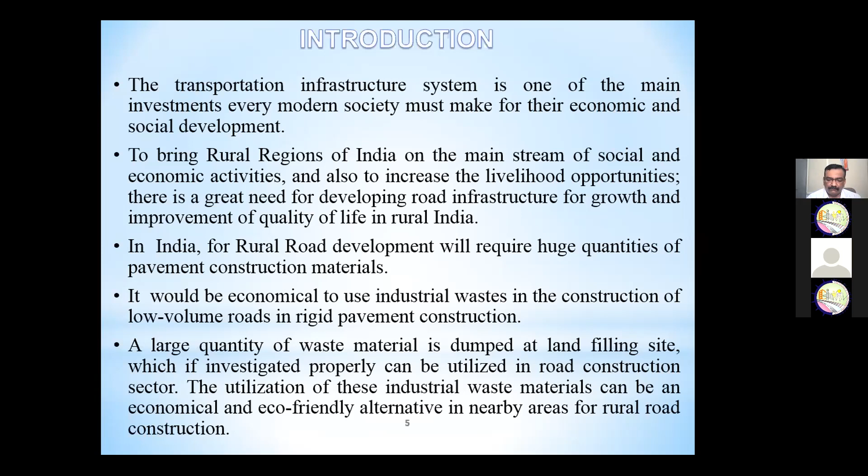Now, as per Rastogi D 2012, rural road connectivity is a key component of rural development since it promotes access to economic and social services, thereby generating increased agricultural productivity, employment in the industry and service sector, as well as productivity, which in turn expands rural growth opportunities and real income, through which poverty can be reduced.

As per Sarkar Asoke 2012, village roads in general have a low volume of traffic consisting mostly of rural transport vehicles. Due to the shifting of industry towards the villages, there is an increase in the volume of traffic on village roads. It necessitates providing a cost-effective solution of connectivity to the villages.

Now, just like the Pradhan Mantri Gram Sadak Yojana, it was a good opportunity at that time, and now also with the current infrastructure development and the growth of construction in the road sector, the building sector, and many other areas, we use this concrete beneficially. Just like in 2022, the Pradhan Mantri says we are required to give houses, and if we use this kind of sustainable concrete, then we save lots of money. Even on national highways and expressways, if we go with this type of concrete, we definitely benefit.

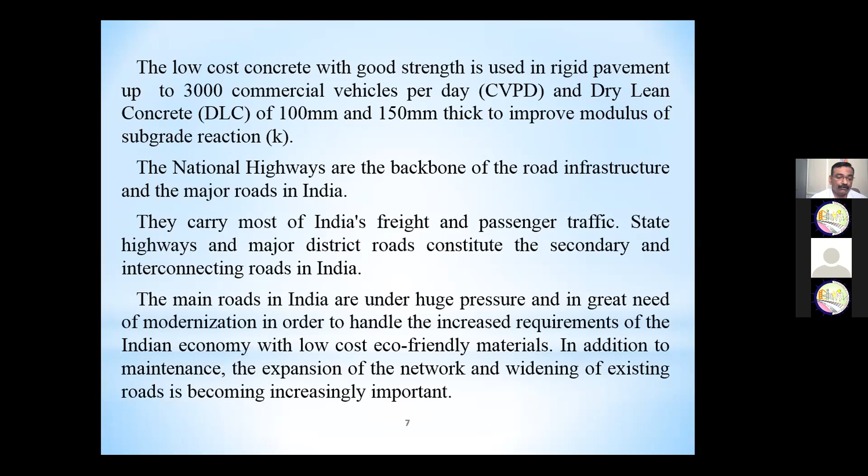So in addition to maintenance, the expansion of the network and widening of existing roads is becoming increasingly important. So just go through this Indian road network in various years, 1950 to 51, 60 to 61, to 2015 to 16 and more. The national highways, state highways, district roads, rural roads, urban roads, and project roads, huge development. And India is having one of the largest road networks of around 60 lakh kilometers, consisting of national highways, expressways, state highways, major district roads, other district roads, and village roads.

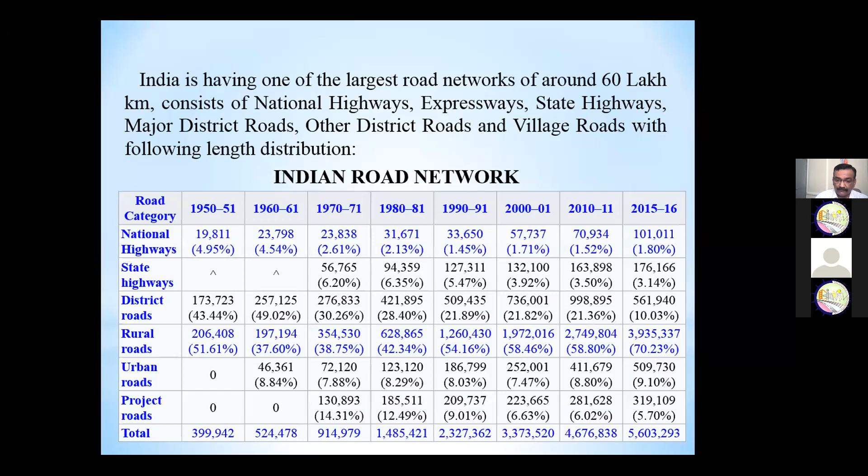So day to day, it is increasing, and the government decided infrastructure development in the current scenario is huge, and the people also require the infrastructure development. Now, the roads handle increased traffic and also allow for a corresponding increase in the average travel speed on India's roads. Now, cement concrete roads enjoy a clear advantage over bituminous roads and are extremely long lasting, often going for 40 to 50 years.

Shri G. Sharan, Director General, MoSRT&H, Government of India, said in 2008 that for sustainable development, the modern society cannot do without using high performance construction material, concrete, in roads and highways. This emphasizes the use of waste materials in cement concrete roads to save the environment and reduce cost with similar or better serviceability.

The study of the use of partial replacement of cement by fly ash, hyposludge, and glass fiber came to mind. Fly ash is an industrial waste, hyposludge is also industrial based, and glass fiber we add for increasing the tensile strength. Fly ash, all of you know, is from thermal power station waste. Hyposludge is paper industry based.

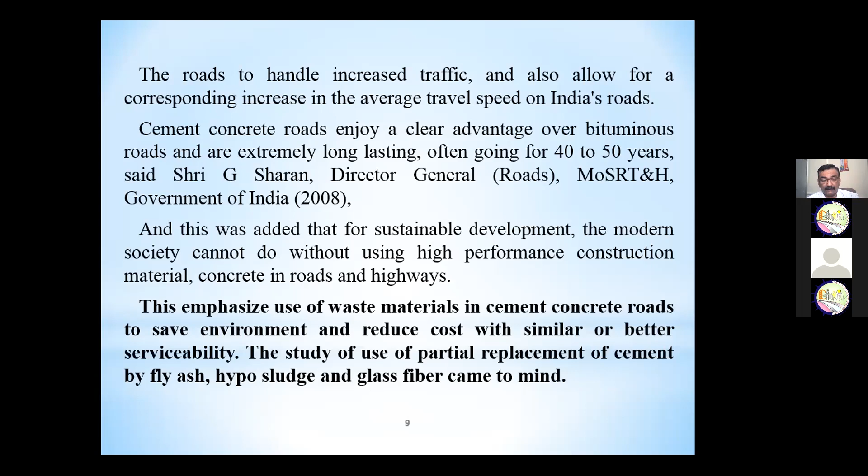Now, the objective is to study the suitability of supplementary cementitious materials like fly ash class F. I use class F, the waste of waste fly ash. Nobody uses it, so I use it in the concrete. And we check how much percentage we add, and we minimize the dumping problem and many other fertile land problems. And also the hyposludge. So, to find out the optimum percentage of fly ash class F and hyposludge in pavement quality concrete.

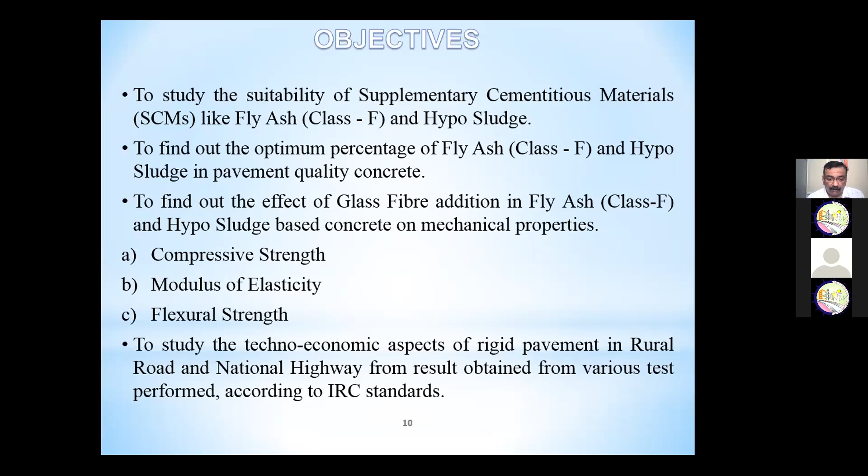To find out the effect of glass fiber addition in fly ash class F and hyposludge based concrete on mechanical properties: compressive strength, modulus of elasticity, flexural strength, and many others, the pull-out test, the durability test and many other tests we have done to study the techno-economic aspect of rigid pavement in rural roads and national highways from results obtained from various tests performed according to IRC standards.

Now, the scope of study: this research is carried out for determining the effect on the development of the rural road network and national highways network by percentage replacement of cement by fly ash class F and hyposludge on the properties of rigid pavement. Supplementary cementitious materials have better scope in construction of rigid pavement, which would lead to safer, simpler, and cost-effective development of rural road infrastructure. To prepare a pavement cost comparative analysis for rigid pavement.

Now, generally, in building construction, we use concrete for the beam, slab, column, footing, foundation, PCC, plastering work. But after building work, we use it majorly in rigid pavement. Compared to building consumption, rigid pavement is on the higher side, in rural road development or national highway construction. So if you go with industrial waste, it is beneficial to society. We solve many problems regarding pollution in air, land, water, and many others. So it is a beneficial study.

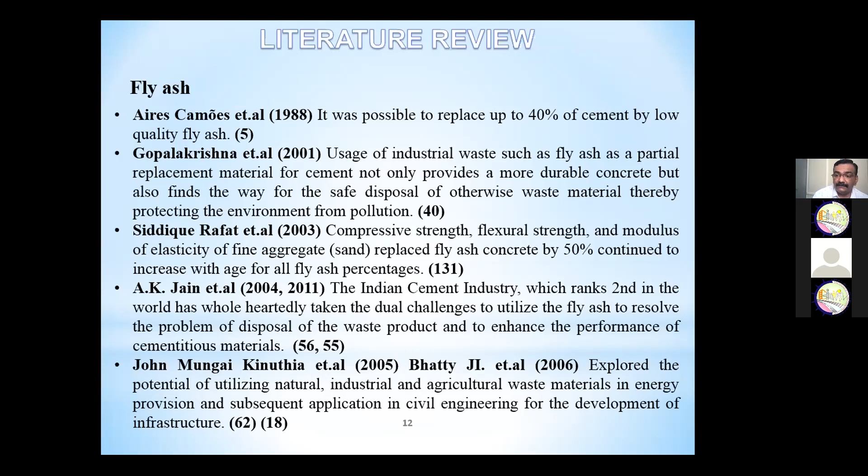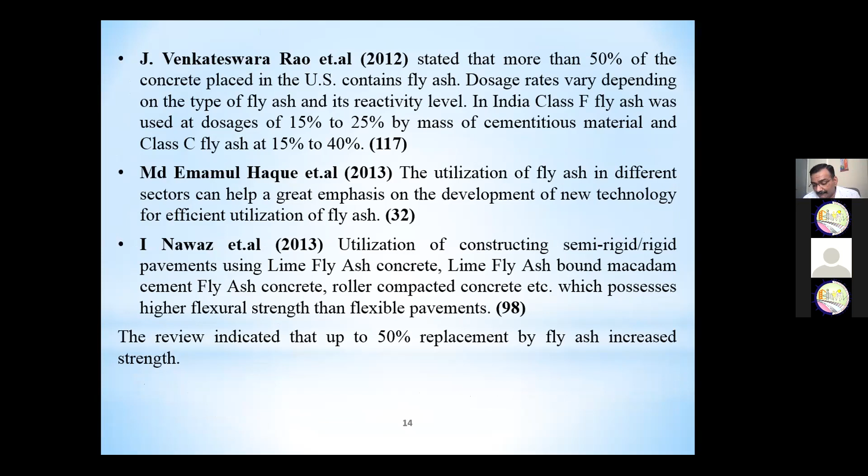So RMC, even now regularly we use fly ash in construction, but now this is in rigid pavement. So from this literature review, it indicated that up to 50% replacement by fly ash increases the strength.

Now in hyposludge, the CaO is more, around 40% CaO. Hyposludge is a paper industry waste, and it's a fibrous material. So CaO is there, and CaO gives benefits to the binding property. So compared to fly ash class F, this hyposludge is beneficial.

And you always focus on the properties in chemical analysis, then it is beneficial. So whichever material you replace, or material you omit, or particles regarding the higher side, then you go with the sand particle, then you go with replacement of sand. But maximum you go with cement replacement, so you save some amount.

Because I'm concerned regarding the construction, so I use the low cost fly ash, even at 50 paisa per kg price of fly ash. So it is beneficial to the society and the nation.

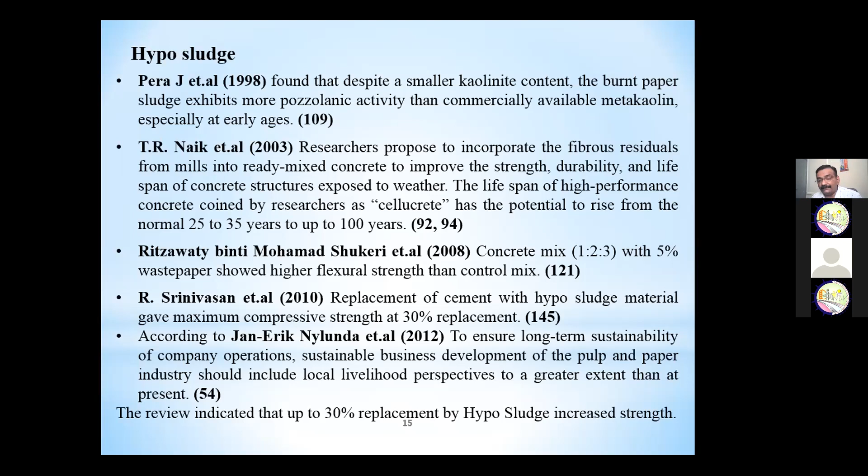So it is beneficial from the flexural strength point of view. It is beneficial to the rigid pavement. So based on the research, we find 0.1 to 0.5% is good regarding the fibrous percentage.

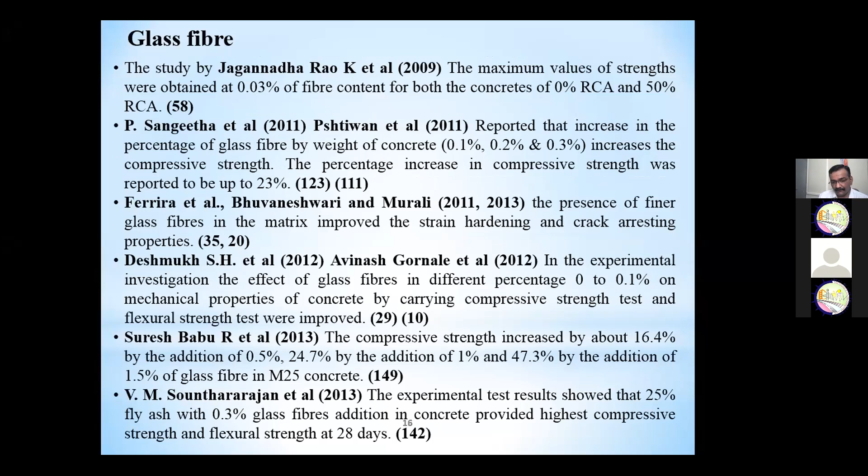Now, for rigid pavement, we refer in some literature review, they use class F and class C comparison, but nobody used hyposludge in rigid pavement. So I am the first to do this work. Okay, and also I go for the patent regarding this hyposludge fly ash concrete, sustainable concrete development.

Okay, now based on this rigid pavement, we have finalized some final outcomes or major outcomes. Based on the chemical properties, the fly ash can be added up to 50%, which gives good results. It is also indicated in the literature review, 30% replacement of hyposludge increases the strength. Different authors say that up to 0.3% glass fiber addition can increase the strength. Literature review also says that rigid pavement has high strength and many other byproducts of industry can be utilized.

But you go through the chemical properties and durability point of view, then after you decide which type of industrial waste is beneficial to this concrete or the rigid pavement. Sometimes we go with some industrial waste, but it is not matched with the properties and has adverse effects in concrete - they corrode the steel bars, they deteriorate the concrete also. So definitely first you go through the chemical properties.

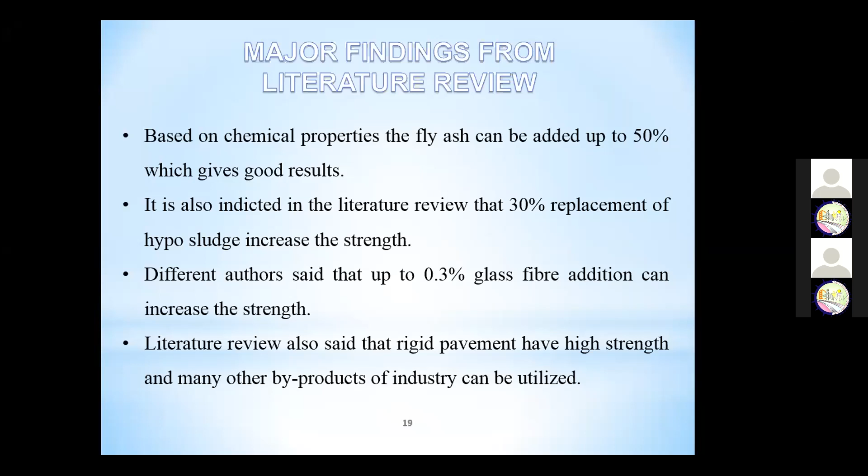Now here is a table regarding the concrete ingredients, the M25 grade and the M40 grade. M25 grade I select for rural road development, and M40 for the national highway as per IRC 62/2005.

This gives details regarding the minimum concrete requirement for rigid pavement for rural roads and national highways. The standard mix is concrete A with 0% cement replacement, B is 10, 20, 30, 40% cement replacement by fly ash class F, and C is regarding hyposludge.

Then D is a 50-50% hybrid mix of fly ash class F and hypo sludge. E is the addition of 0.1% glass fiber in fly ash. F is addition of 0.1% glass fiber in hypo sludge concrete with cement replacement by hypo sludge. G is also 50-50% replacement of fly ash and hypo sludge with cement and addition of 0.1% glass fiber. H is 0% cement replacement with 0.1% added glass fiber.

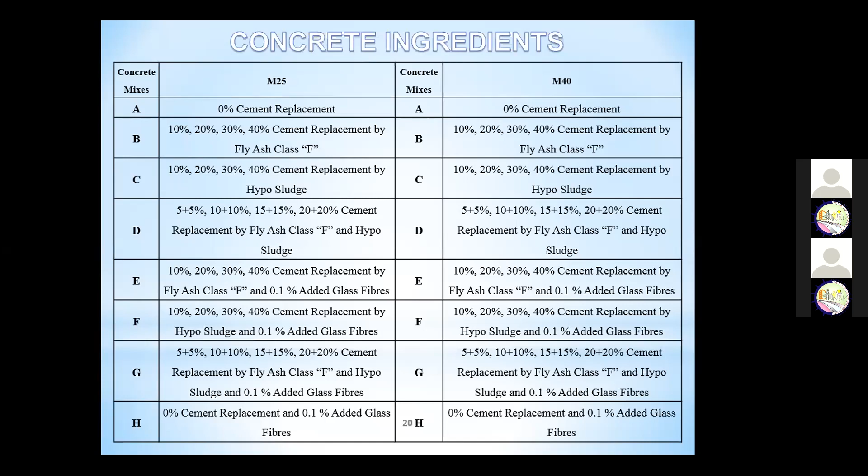Now some concrete mix designs: for M25 grade, 0.5 is the water cement ratio, cement 372 kg per meter cube, fine aggregate 558 kg per meter cube, same way the coarse aggregate. And for M40 grade, 0.38 water cement ratio, 473.68 cement, and some other fine aggregate, coarse aggregate, and water. This is my design mix based on the design mix code and standards, the material properties based on this design.

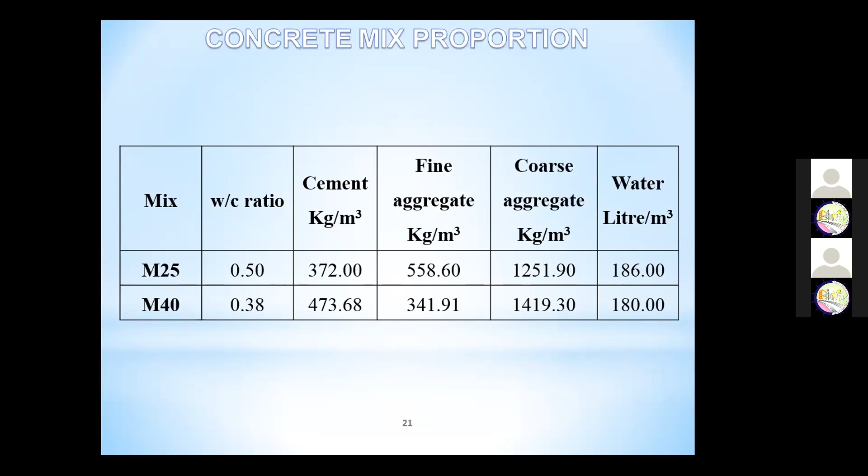Now I select OPC 53 grade cement, fly ash class F, a power plant maize product. I select the maize product fly ash near Sayaji industry, near Kathwada in Ahmedabad. Hypo sludge from JK paper mill near Songadh in Tapi district, Gujarat. Coarse aggregate locally, fine aggregate locally, and glass fiber from KDM glass fiber, Ankleshwar, Bharuch. So I select these materials for my work.

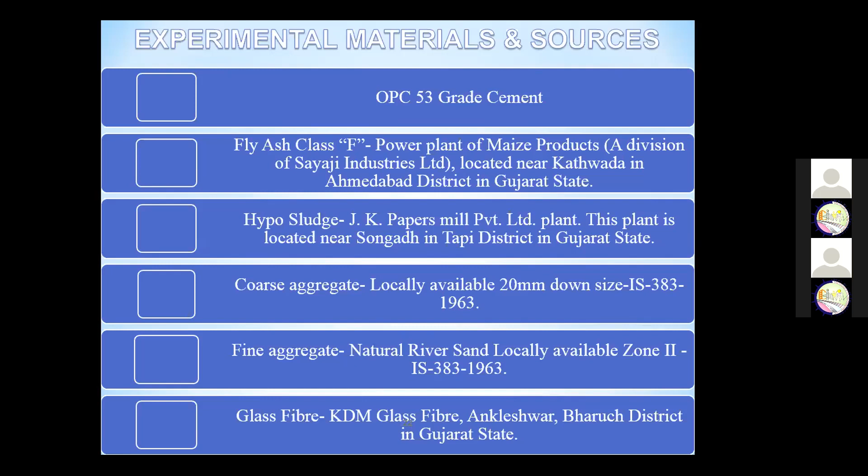Now, fly ash is a major byproduct of coal-based thermal power plants. It is a fine powder recovered from the gases emitted by burning coal during the production of electricity. So we all know this is a coal-based thermal power plant byproduct.

This is a very important table regarding the comparison between ordinary Portland cement and class F fly ash. Here the silicon dioxide SiO2 is 21.77 in cement and 62 in fly ash F class, so almost 3 times more. And Ca in cement is 57, but in fly ash it's 5.3. So my fly ash's bonding properties are very less.

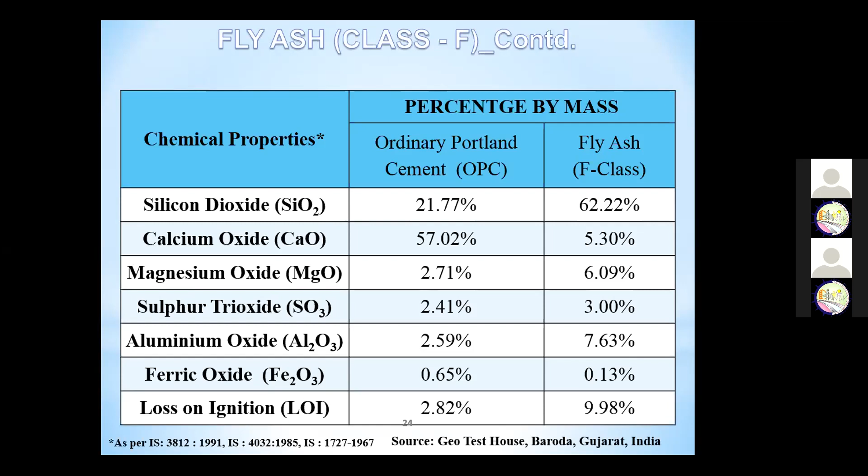So nobody used it, so I use it for the research. This fly ash, and also we go for the hypo sludge, this hybrid mix. This is tested by the Geo Test House, Baroda, as per the Indian standard.

Paper industry waste: the paper making industry generally produces a large amount of solid waste. Paper fibers can be recycled only a limited number of times before they become too short or weak to make high quality paper. This means the broken low quality paper fibers are separated out to become waste sludge called hypo sludge. About 300 kg of sludge is produced for each ton of recycled paper - this is a very important line.

So I refer to Visakhapatnam, where there is one paper industry. They contacted me regarding hyposludge bricks and hyposludge concrete. So they invited me to give the recipe for this work, and they introduced it in that area in Visakhapatnam.

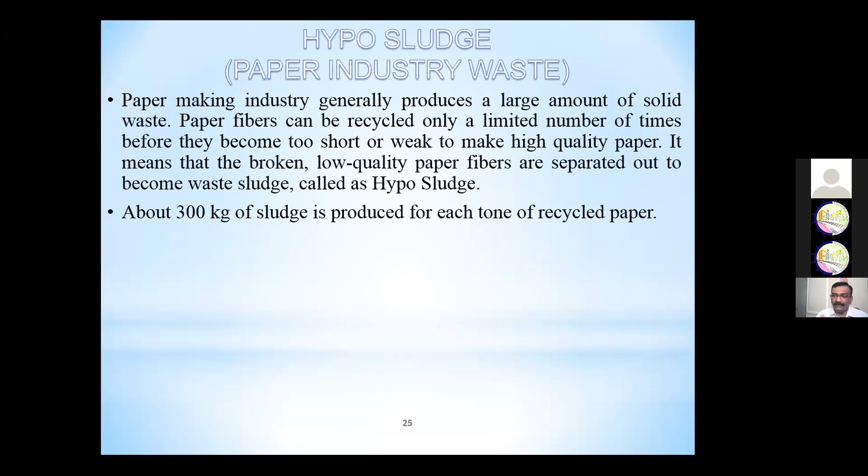So it depends, if you have published some of your work, then it is beneficial to the society also.

Now comparing the hyposludge properties with the cement properties. The silicon dioxide content is very less, 5.28. But the calcium oxide content is 47.84%, so the binding property is largely available. This is the turning point of this particular work. If you go with the hyposludge and fly ash class F hybrid mix, they cover the cement properties. It is good.

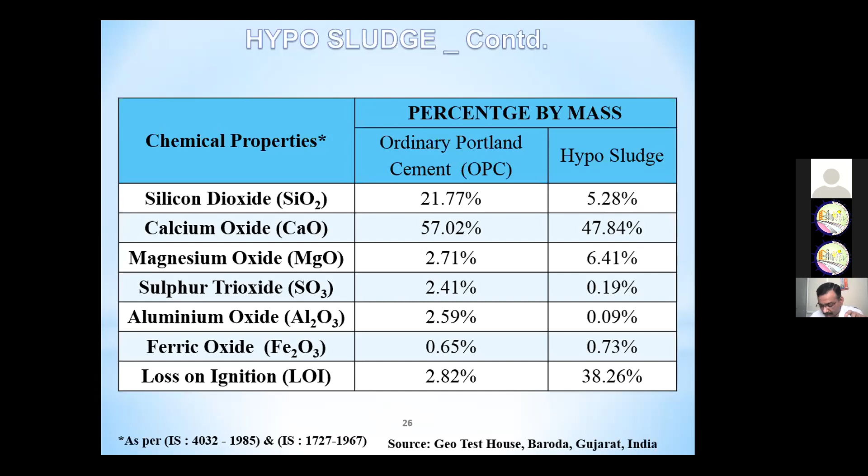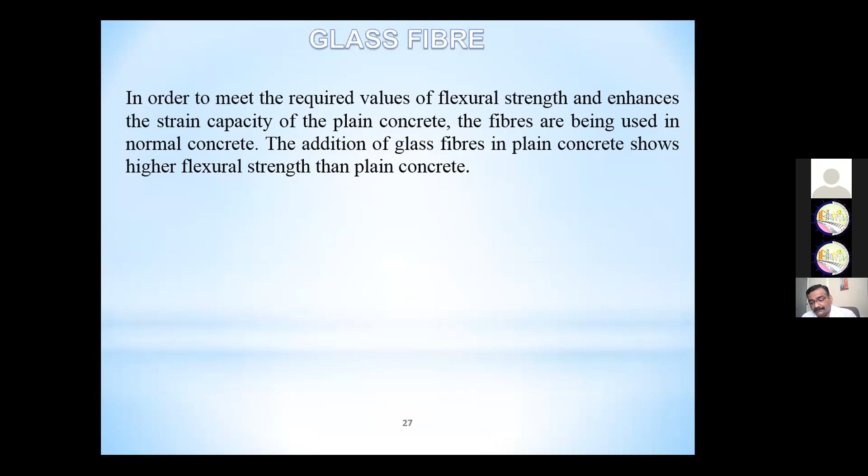Now, glass fiber, in order to meet the required values of flexural strength and enhance the strain capacity of plain concrete, fibers are being used in normal concrete. The addition of glass fibers in plain concrete shows higher flexural strength than plain concrete.

I used KDM glass fiber, length 12 mm, specific gravity 2.6, density 2.6, elastic modulus 73 GPa. These are the details given by Shivam Enterprise, Ankleshwar. It's a standard detail regarding the KDM fibers, 12 mm in length.

Now, the tests to be performed on hardened concrete: compressive strength, flexural strength, modulus of elasticity. I actually did almost 17 tests in this work. But as per IRC requirement, only from the design point of view: compressive strength, flexural and modulus of elasticity. So I put in this work the compressive, flexural, and modulus of elasticity at different ages: 7, 14, 28, 56 and 90 days. But I used up to 360 days, 1 year.

From the durability point of view, right. Then flexural strength at 7, 14, 28, 56 and 90 days. And modulus of elasticity at 28, 56 and 90 days.

Fly ash gains strength during the period of time, the duration. If you give it duration, the strength increases in fly ash, as per Malhotra's, the Canadian researcher's, findings.

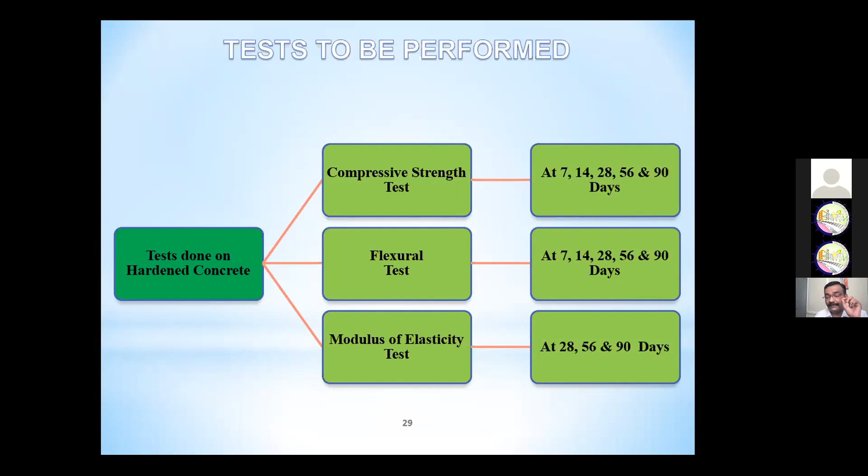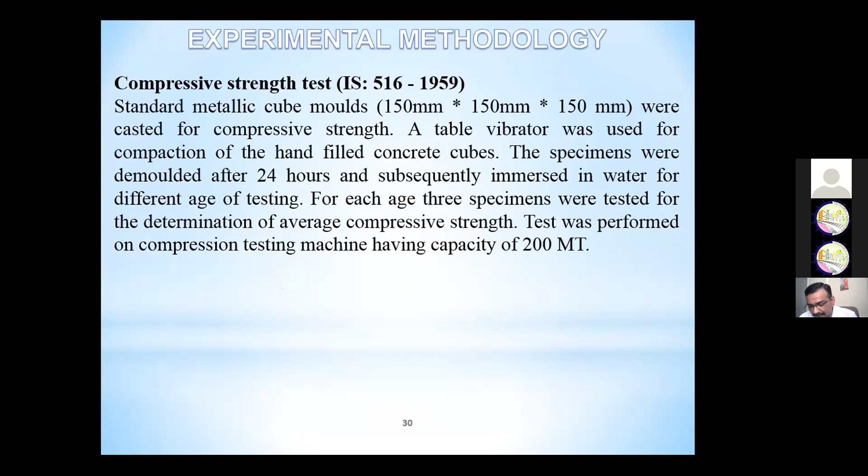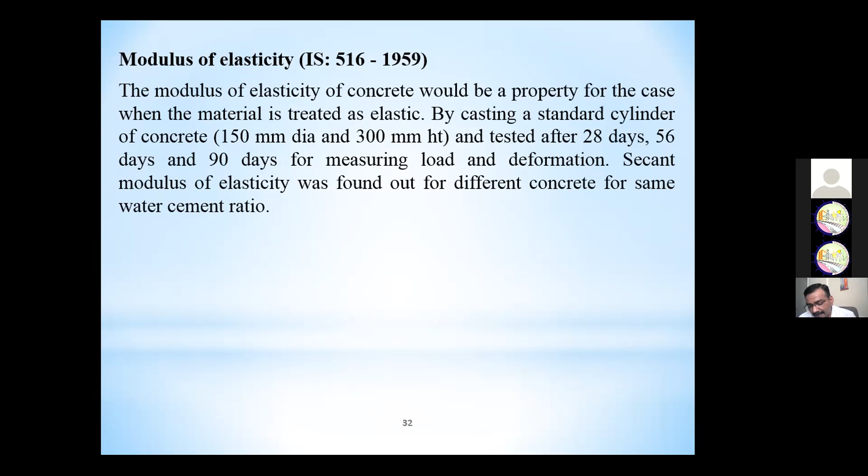Now the standard experimental methodology of compressive strength is as per IS 516/1959. We will not go into this experimental methodology because we all know the compressive strength test. Then the flexural strength test is as per IS 516/1959. Then for modulus of elasticity, we require a cylinder 150 mm diameter by 300 mm, at different ages of 28, 56, and 90 days. We measured the load and deformation.

Now, is the graph visible or not? Hello? No sir, it's not visible. Then how do we proceed with this? Sir, the graph is not visible, only the cursor is there.

So let me go for the PDF file. Yeah sir, sure. How to... stop sharing, okay.

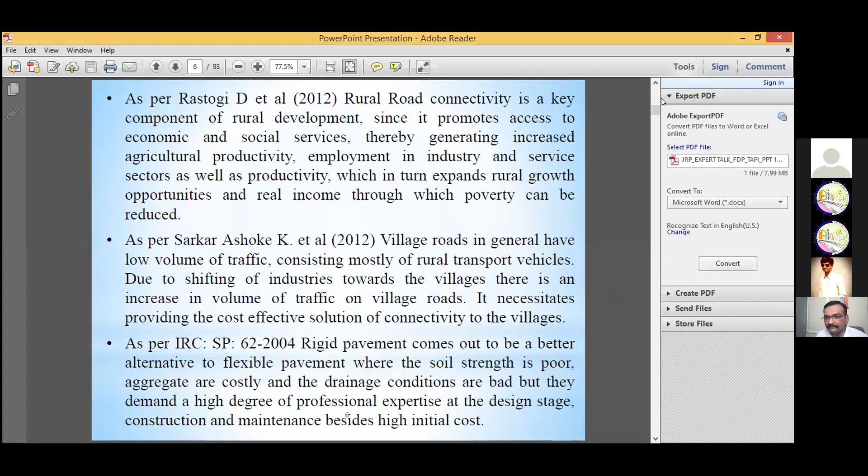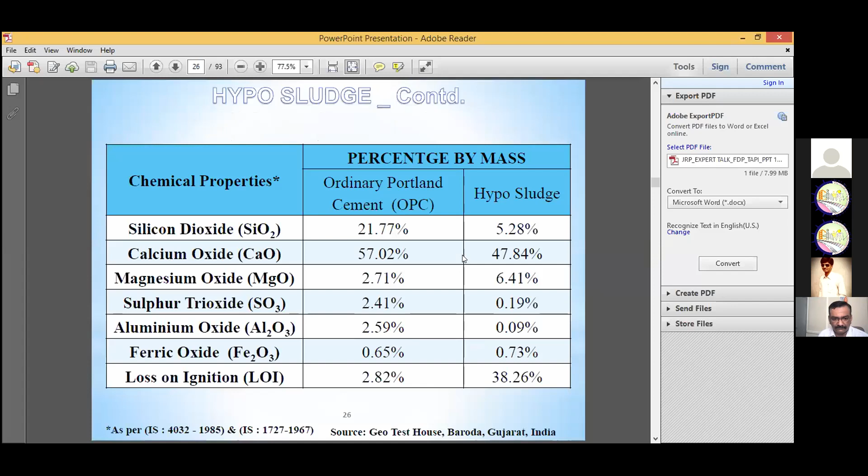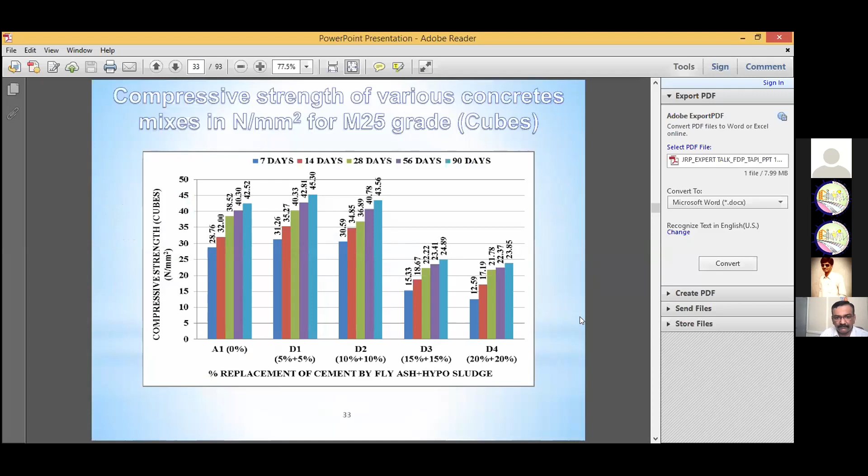Okay, yes, it is visible? Aware, okay, yes, okay sir. But I think on this right hand side there is something.

Okay, now refer to this table, sorry, this tabular and graphical representation regarding compressive strength and the percentage replacement of cement by fly ash plus hyposludge. So A1 is 0%, D1 is 5 plus 5%, D2 is 10 plus 10%, up to 40% with M25 grade of concrete for the rural road. And this is the compressive strength results at 7 days, 14 days, 28 days, 56 and 90 days.

Here I have omitted the results regarding fly ash class F only concrete, and cement replacement with hyposludge only. I omitted the results of the B series and the C series. I go directly, due to time constraint also, to the 50% hybrid mix.

Refer here to the standard concrete: 42.52 at 90 days. But refer with this D1, 5 plus 5%, so fly ash F plus 5% and hyposludge 5%. You see 45.30 strength at 90 days, and similar at 28 days.

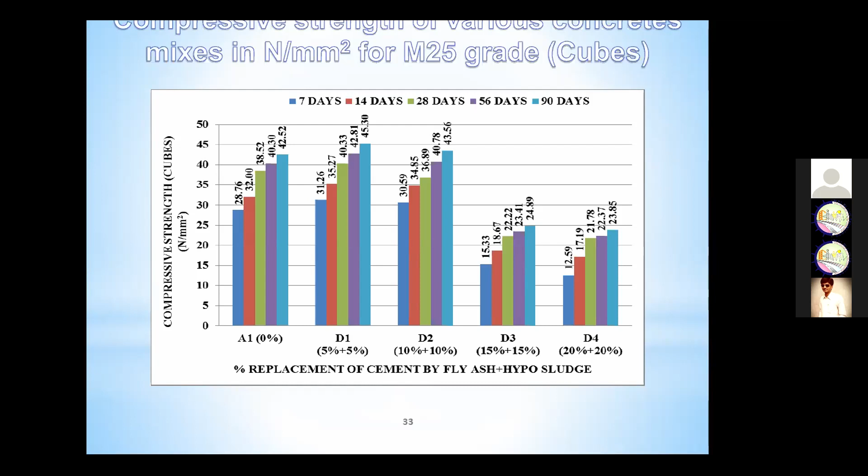37.63. So 10% plus 0.1% glass fiber increases the strength. So it is beneficial regarding the compressive strength, and at a later stage it is beneficial to the rigid pavement. Now, the characteristic compressive strength of various mixes of concrete are presented. It shows the graphical representation of the hybrid mix, fly ash plus hypo sludge concrete.

It is observed that the hybrid combination 10% plus 10% gives high strength for M25 grade concrete in comparison to conventional mixes. The 30 and 40% hybrid mix combination, even with the addition of 0.1% glass fiber, shows the required strength gain at a longer duration, which is comparable with a conventional mix. So 30%, 40% we definitely use, but the duration is large, and that's the problem regarding the time period. We go up to 360 days also.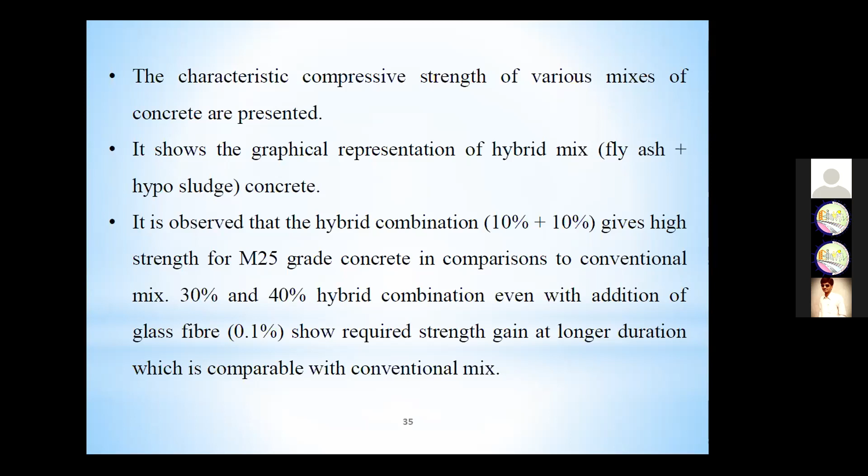Now here you see the compressive strength of cubes with replacement of cement by fly ash plus hypo sludge for the M40 grade of concrete. In M40 grade, A2 is 50.81 Newton per mm square. Same way you see D5, D6, D7 and D8, 50% fly ash and hypo sludge, and D6 is 51.85 at 28 days, and at 90 days it's 54.82 Newton per mm square.

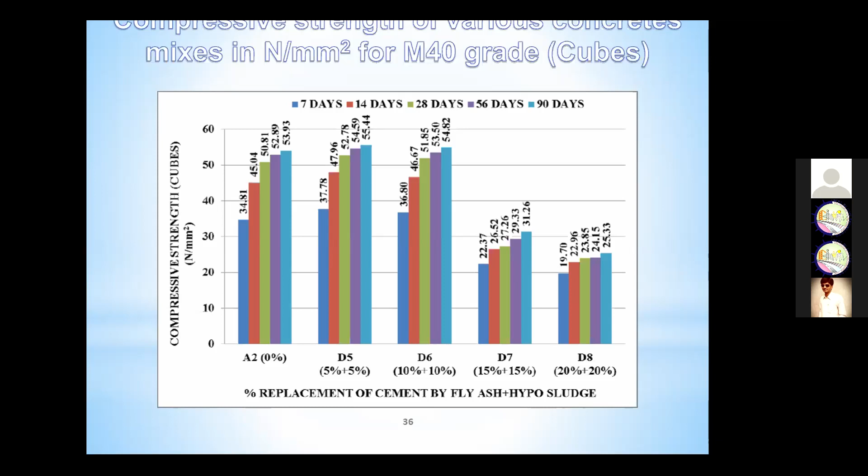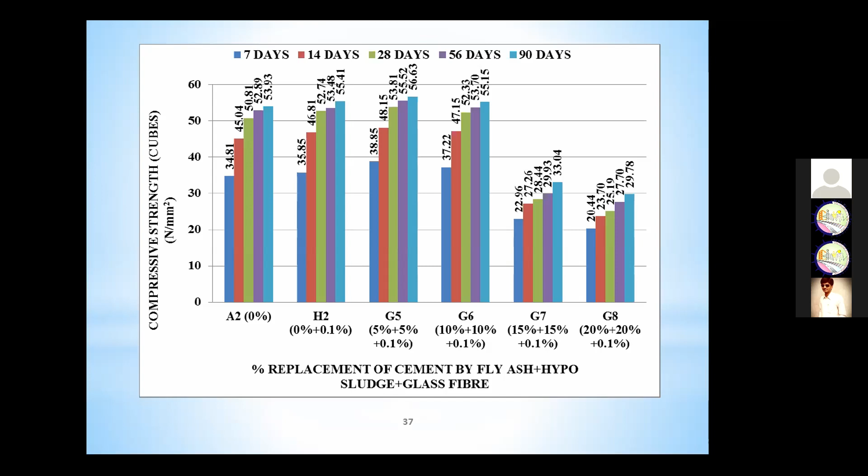Now same way with the addition of glass fiber, A2, H2, G5, G6, G7, G8, the compressive strength of M40 grade concrete at 7, 14, 28, 56 and 90 days. So you see G6, 20%: 10% fly ash, 10% hypo sludge and 0.1% glass fiber, the strength is 52.33 Newton per mm square. Same way the hybrid mix in M40 grade, 20% gives high strength, and the 30 to 40 hybrid combination, even with the addition of 0.1% glass fiber, shows the required strength gain at longer duration, which is comparable with the conventional mix.

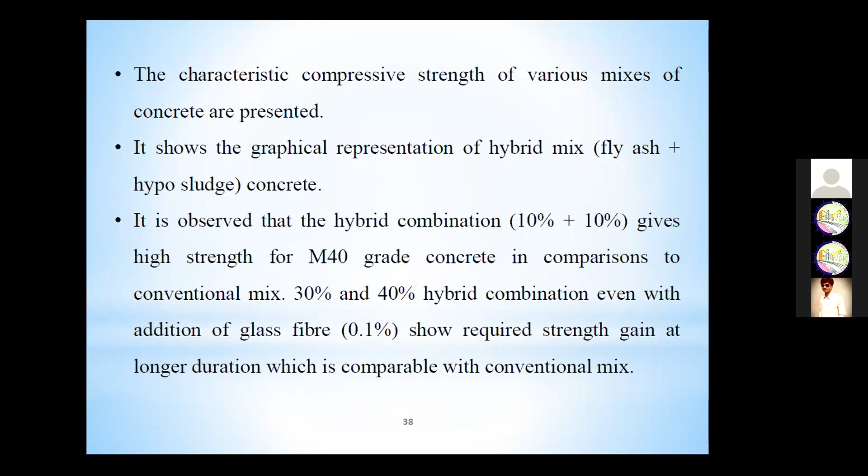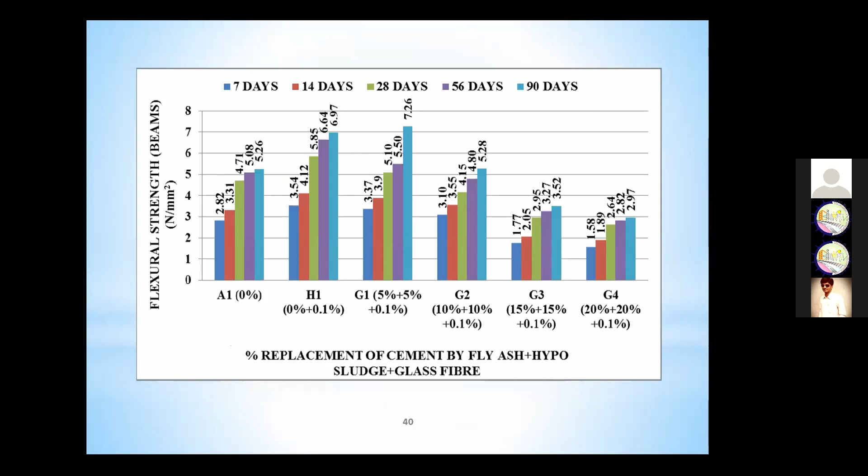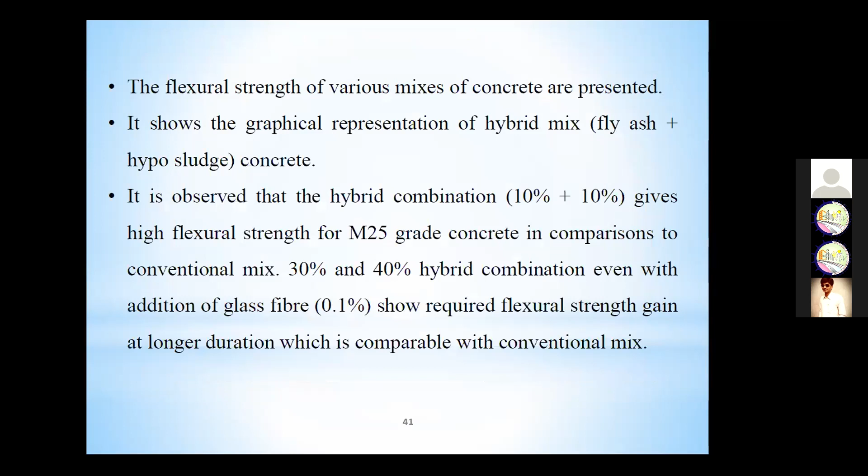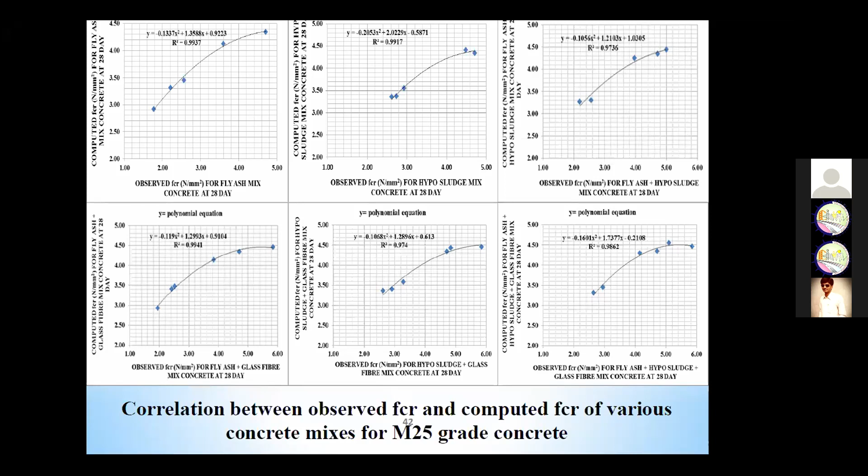Some regression regarding the correlation between the observed FCR and computed FCR for various concrete mixes of M25 grade concrete: B1, B2, B3, B4, C1, C2, C3, C4, D1, D2, D3, D4. Then for the M40 grade of concrete, nearer to 1, the regression is good. So with hybrid mix, without hybrid mix, glass fiber in the hybrid mix, and glass fiber concrete, hybrid mix and glass fiber give excellent strength in the M25 and M40 grades of concrete.

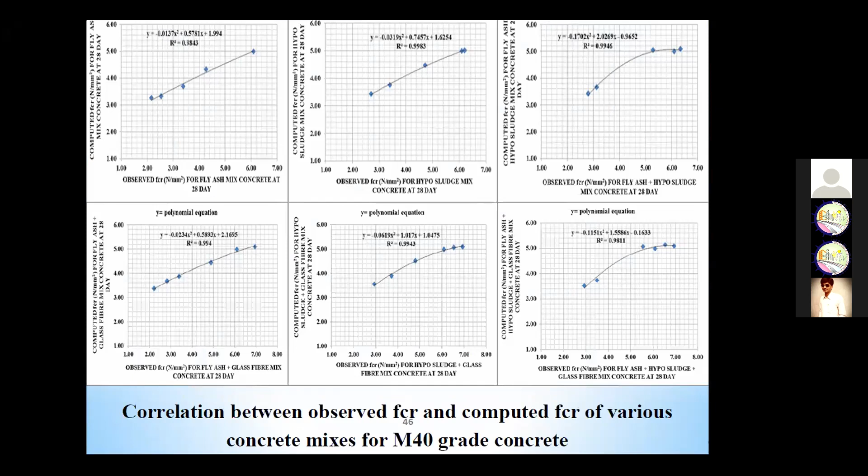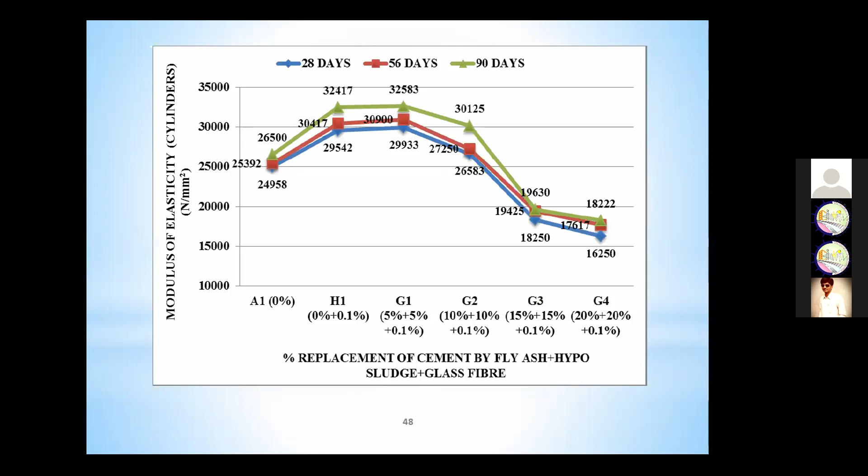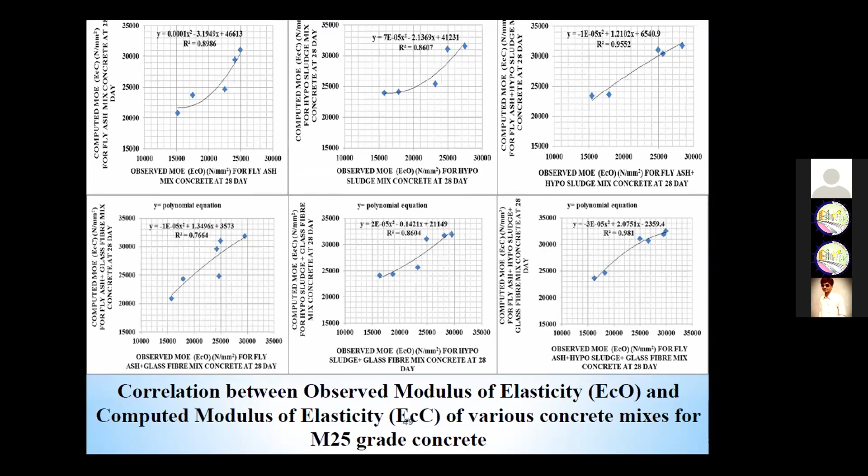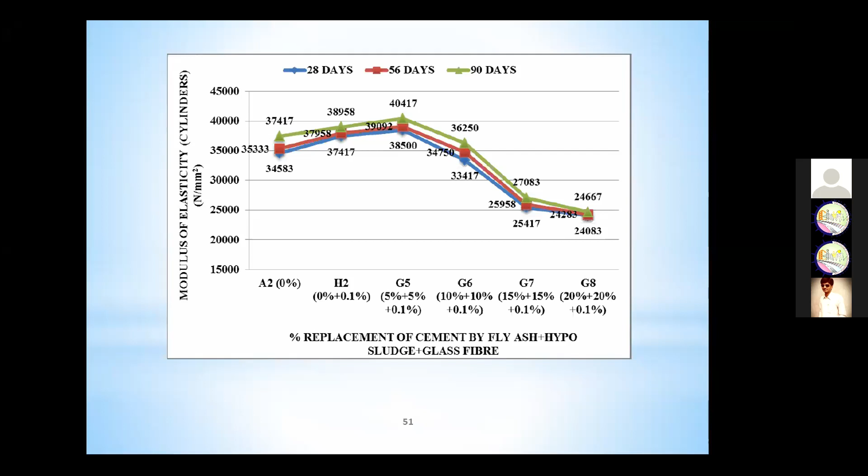Now same way with the addition of glass fiber, D2, G1 5 plus 5% compared to H1 and A1 gives good modulus of elasticity. Same way, the observed and computed modulus of elasticity are nearer to 1, so it is good. Then the prediction regarding modulus of elasticity of M40 grade concrete, same way with glass fiber addition, and the observed MOE and computed MOE are near to 1.

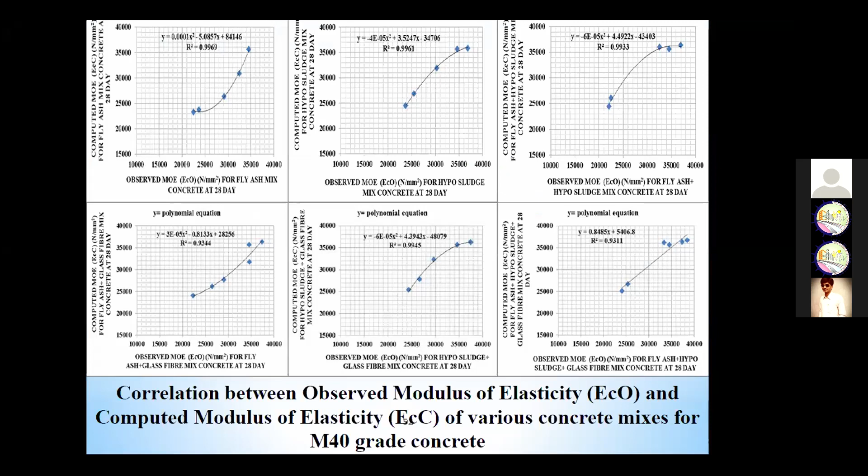Then after, we go for the rigid pavement design for rural road. Up to that, the structural portion, the concrete work, is over. Now, regarding the transportation area, the rigid pavement design for the rural road. For the rural road, the PQC, pavement quality concrete, is very important as per IRC SP 62/2004.

The subgrade characteristic required is the modulus of subgrade reaction K. The unit is kg per centimeter square per centimeter. The value of K is obtained by the plate load test or using CBR values from table 1 as per IRC SP 62/2004. Then curing and the compressive strength.

So design parameters regarding the mix design of materials, pavement thickness, climate, rainfall, temperature, frost action, the surrounding environment, height of embankment, foundation cutting, geometry, pavement materials, and the CBR of the soil subgrade, which is very important. If the CBR is good, then the rigid pavement thickness is less.

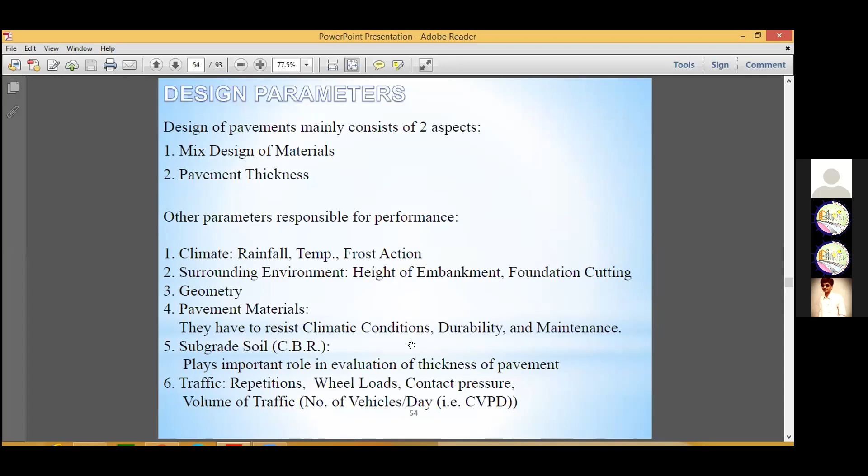So it depends on CBR, the value of the concrete of the pavement, and the traffic repetitions, wheel loads, contact pressures, traffic volume, number of vehicles per day, CVPD. These are some variables for the design of rigid pavements as per IRC SP 62/2004. All these 14 variables we used in the design of rural road.

Based on IRC SP 20/2002 and IRC SP 62/2004, we go for 2% CBR with 30 kilonewton wheel load, 4% CBR with 30 kilonewton wheel load, 6% CBR with 30 kilonewton wheel load, and the same way with 51 kilonewton wheel load. So 2%, 4%, 6% CBR with the different wheel loads we have calculated, with 500 vehicles per day CVPD for the rural road design.

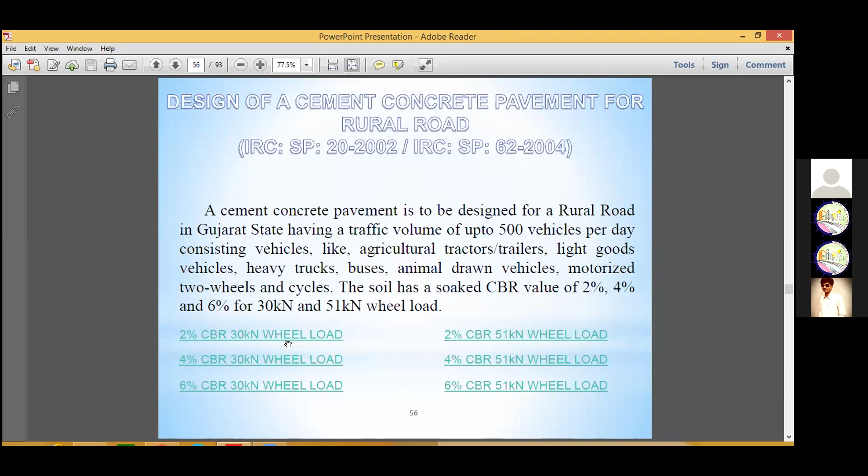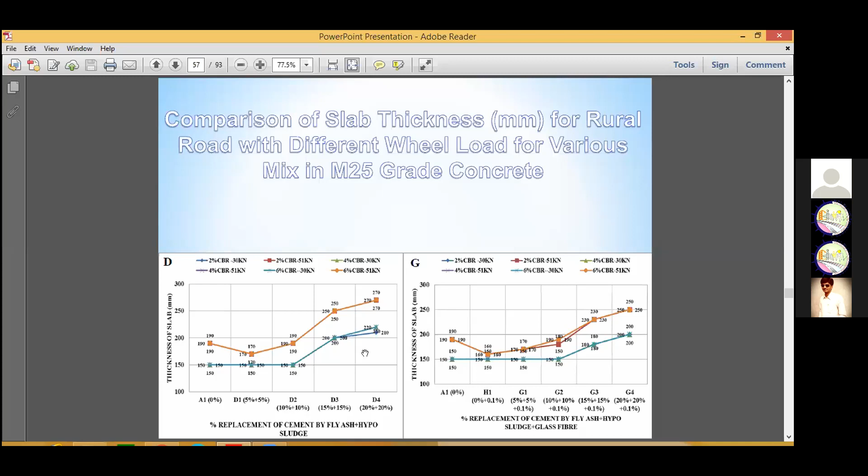If your concrete quality is poor, the thickness of pavement is increased. If your CBR value is less or more, it is also affected. So if the CBR is high, or your ground is hard, then your pavement thickness is less.

Same way, refer 14 to 20% for the 2, 4 and 6% CBR with 30 kilonewton and 51 kilonewton wheel load, and 0.1% glass fiber added with up to 20% replacement of cement by fly ash and hypo sludge, maintaining slab thickness with a slight increase in cost for 2%, 4%, 6% CBR with 30 kilonewton and 51 kilonewton wheel load.

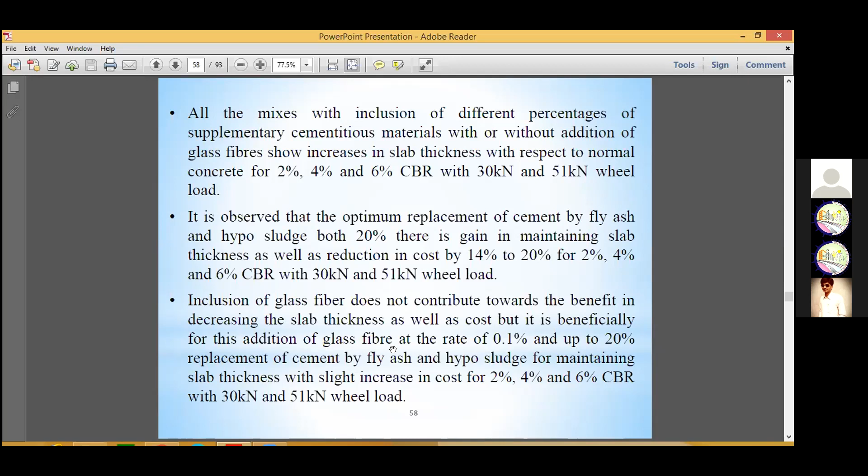Here, for the national highway design as per IRC 58/2002 for M40 grade of concrete at 28 days. India had 70,934 kilometers as of 2011, but now it is around 1.5 lakh or more. There are 2-lane, 4-lane, 6-lane, but here I designed a 2-lane, 2-way national highway in Gujarat state, with 500, 600, 700, 800 up to 3,000 commercial vehicles per day, CVPD, at the end of the construction period.

Here the variable is different CVPD, 500 to 3,000 commercial vehicles per day. Another variable is dry lean concrete, DLC, 100 and 150. And another variable is 2%, 4%, 6% CBR value. So in a national highway, we go for the CVPD, dry lean concrete, and the CBR.

Now refer to this table for the standard concrete A2 with the 28 days results, and then we design the slab thickness. In table A2, A2 is a standard concrete. CBR is at 2%, 4%, 6%, and K depends on table 1. K is in kg per centimeter cube, so it's readily available. DLC I assume 100 and 150.

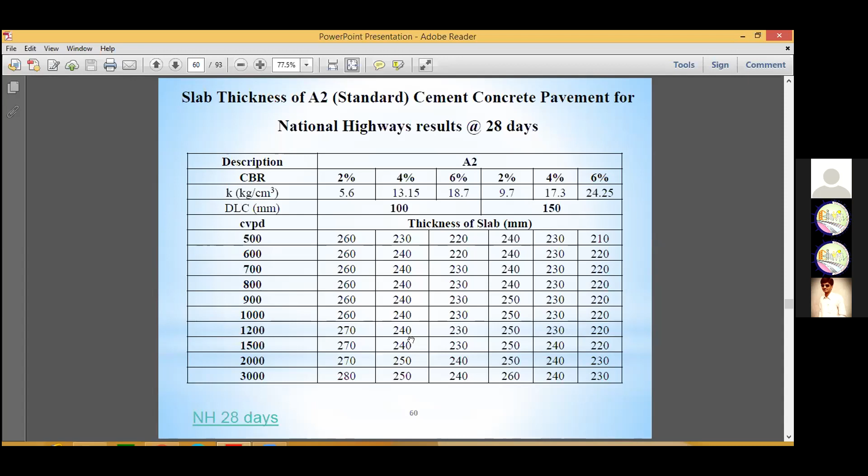And we refer this graphically. You very easily understand the 260 constant and 270 and 280. So if the variable increases or decreases with this particular work, we have referred to this kind of graphical representation, and we find the pavement thickness from 150 to 260, 280. And this thickness affects the cost of the concrete.

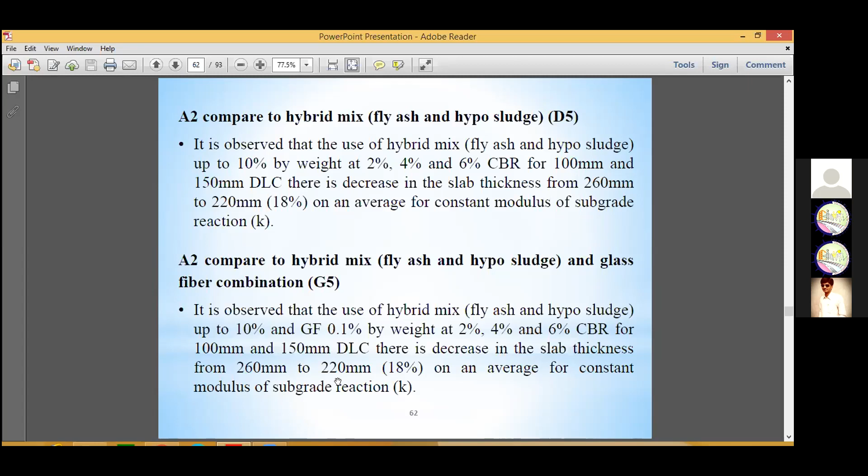If the thickness of the PQC, pavement quality concrete, is increased, the cost of concrete is increased. Same way, from this point of view, the 18% is increase on average. 18% is decrease in the total thickness, 260 to 220. Same way we go with the 90 days.

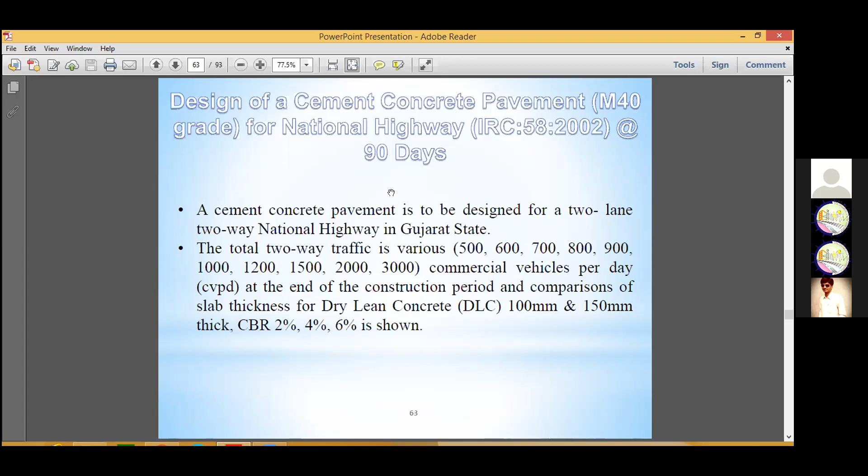Then after I completed the work, around the 360 days. After 1 year, what is the impact? What is the effect on this particular work in the strength of this particular pavement, and the cost and the durability? So it's a huge work, huge task. But up to here, in this particular work, we go up to 90 days and we check.

So here, same A2, you refer this table. I completed all A2, B1, B2, B3, B4, C1, C2, C3, C4, D1, D2, D3, D4, and many more, around 52 types of concrete tested and analyzed in rural roads and in national highways at 28 days, 90 days and 360 days.

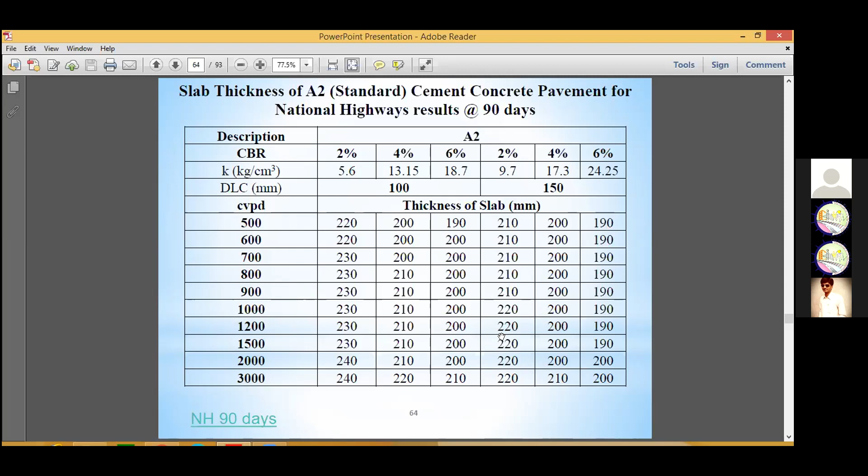So here also 190 to 240 mm thick slab, and we refer the same pattern of this particular work. The D5 and G5, here the 5% decreases 200 to 190. The cost economic feasibility regarding the cost of materials: the cement at that time 6.4 rupees per kg, fine aggregate 0.6 rupees per kg, fly ash 0.5, 50 paisa per kg.

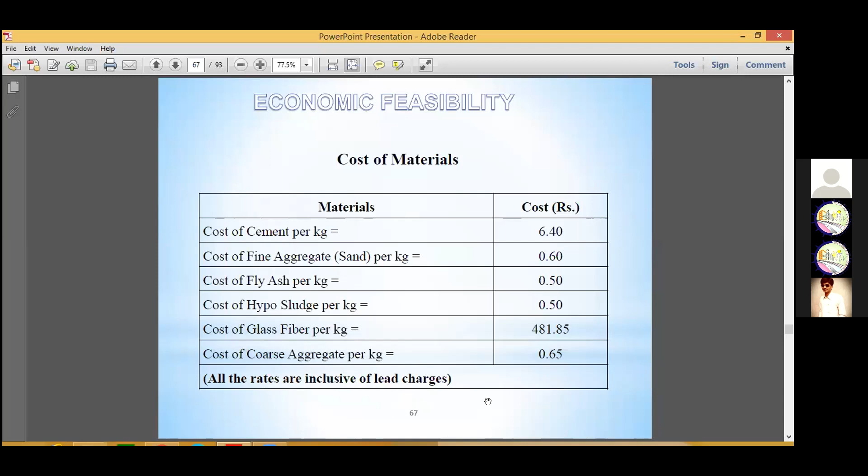Hypo sludge also 50 paisa per kg. Glass fiber 481 rupees per kg. Coarse aggregate 0.65 rupees per kg, including lead charges. This is regarding the cost of materials rate. Same way, the M25 grade of concrete, we have referred with around 3,530 rupees.

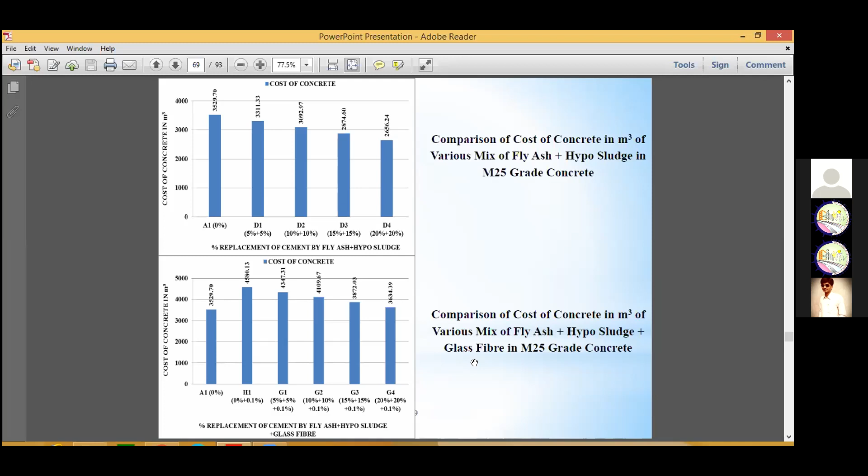And the same way we have referred to the D1, D2, D3, D4 hybrid mix cost, and H1 with the G1, G2, G3, G4. So D2 3,090 and G2 4,100 for the M25 grade of concrete. Same way M40 grade, the D5 3,800 and G5 4,900. Compared to A2, the cost is increased due to the glass fiber cost.

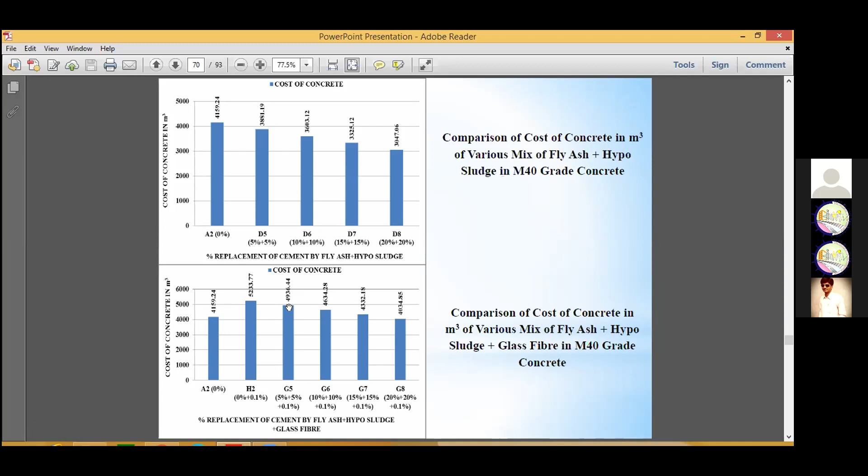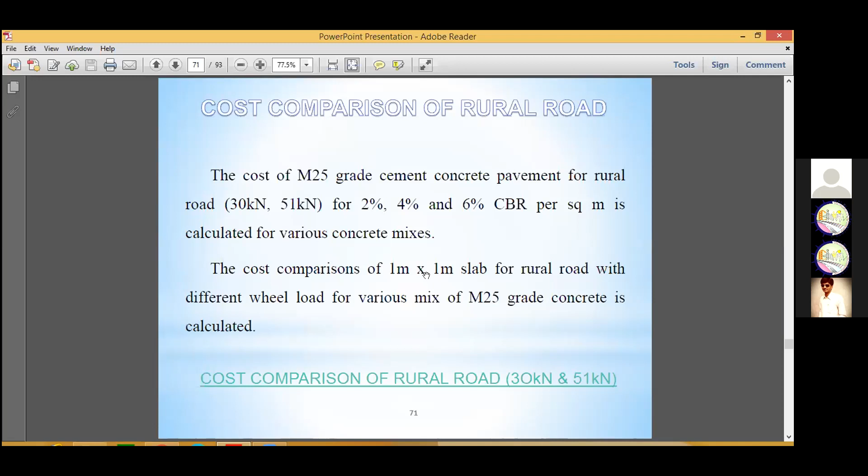But if you go with your own glass fiber production, then definitely the cost is decreased, and we get lots of benefits from this sustainable concrete. Now cost comparison of rural road. So what is the effect from the cost point of view of M25 grade concrete in rural road construction work?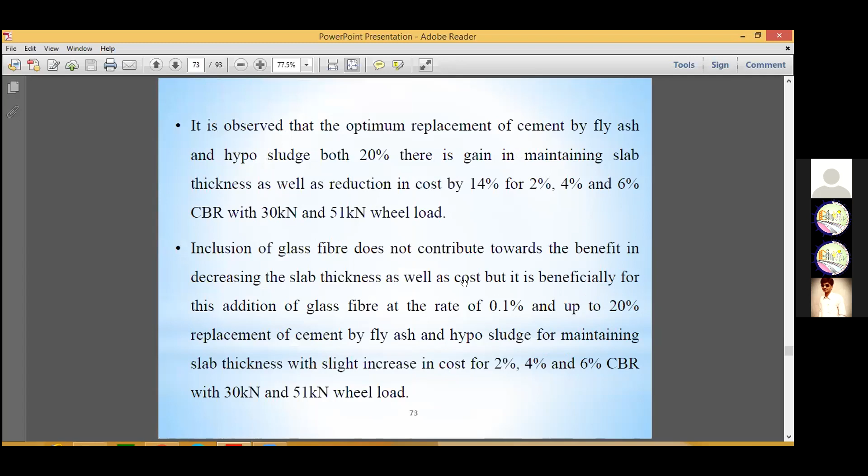So here you refer the difference, 463 to 718. And here, including the glass fiber, you refer 529 to 908 rupees increase. So the cost comparison of a 1 meter by 1 meter slab, rate per square meter of 150 mm thick. Now we refer this comparison with the 20% gain in maintaining slab thickness. So reduction in cost is around 14 to 15%.

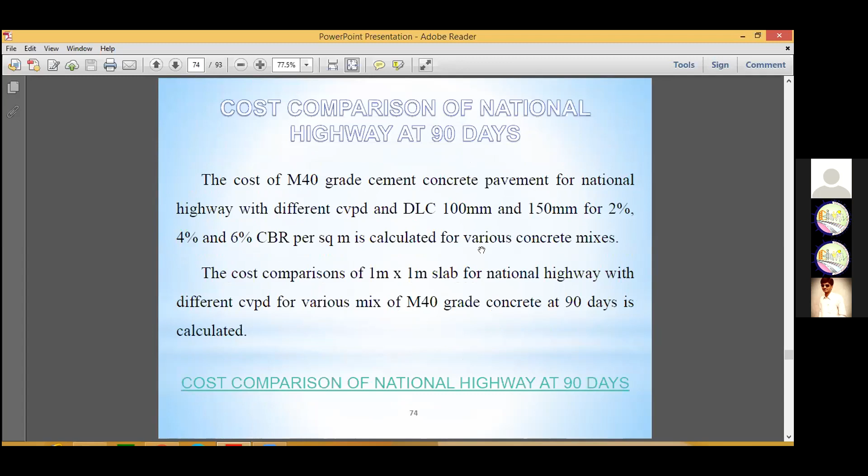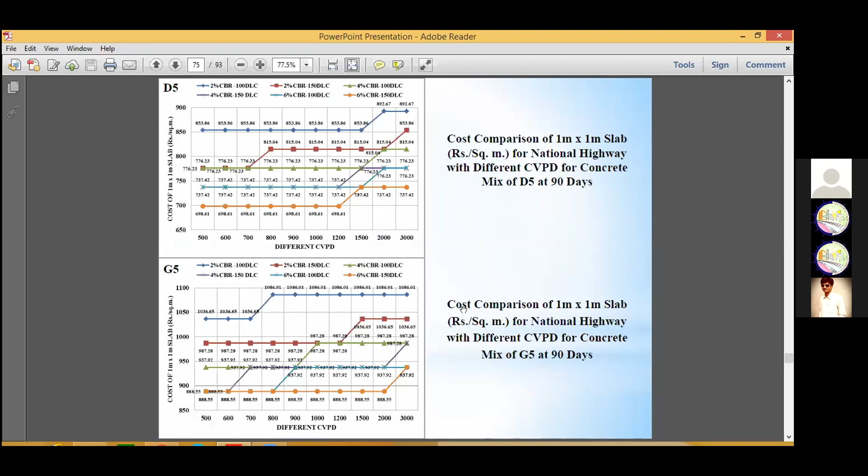Same way in highways, 90 days, national highway, what is the effect on M40 grade of concrete from a cost point of view: 698 to 892 and 888 to 1086. So in a cost comparison, 1 meter by 1 meter slab, rupees per square meter for the national highway, different CVPD at 90 days. So here 10% replacement, hybrid mix, fly ash and hypo sludge, the cost decreases 6%. But if you add hybrid mix with the addition of glass fiber 0.1%, it increases 41%, 850 to 1,200.

So if you go with different kinds of low cost fibers, definitely this cost also decreases. And if you have your own production, then also it is beneficial in concrete strength and rigid pavement cost.

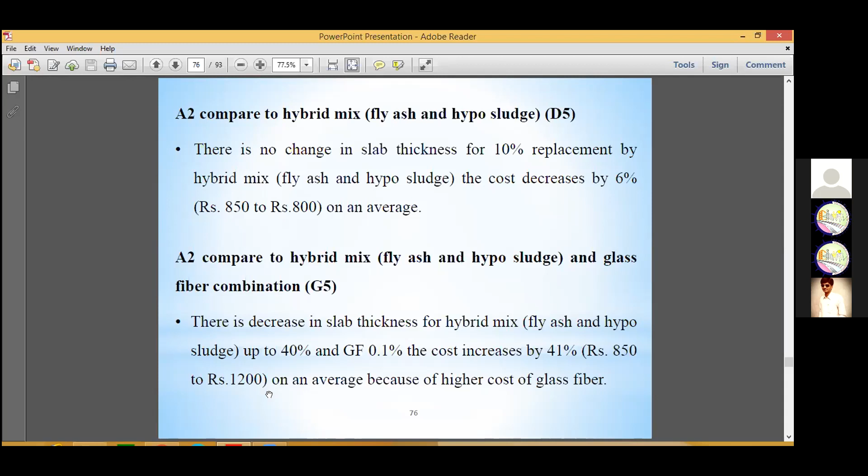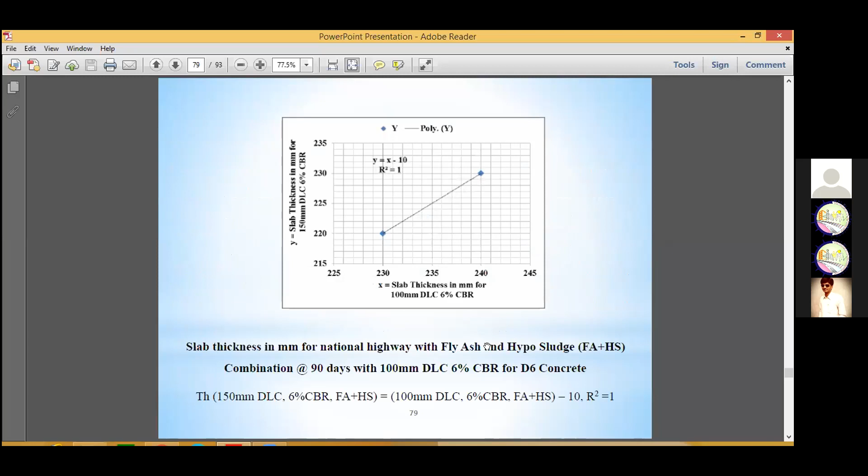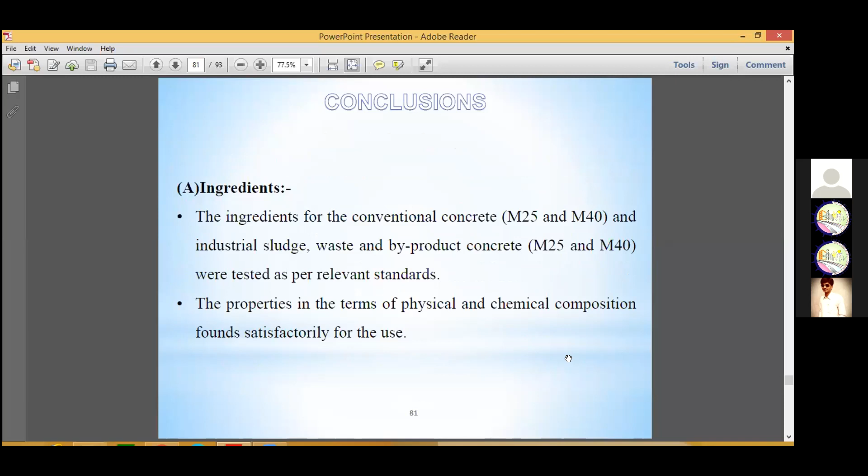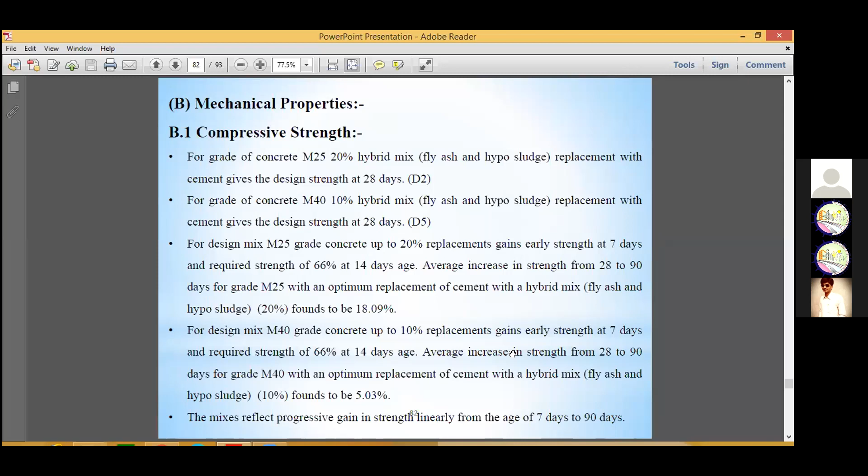Overall, the conclusion we have already discussed in these slides: the M25 grade and M40 grade with different ingredients, fly ash and hypo sludge, hybrid mix with the addition of 0.1% glass fiber. It is overall beneficial, but the glass fiber cost is somewhat high. So you can add some low cost fibers and get low cost sustainable concrete for rural road development and for national highway development.

Now the research outcomes: the potential use of industrial byproducts to make green concrete, leading to preservation of natural resources and a contribution towards the reduction in greenhouse emissions. Concrete with the inclusion of hypo sludge and fly ash can be used for high value applications as it has both improved engineering as well as durability parameters.

The experimental investigation recommended 20% and 10% replacement of ordinary Portland cement by hybrid supplementary cementitious material for M25 and M40 respectively. The experimental and analytical investigation reflects potential gain of economical pavement thickness with the average cost saving of 12% to 6.5%. So looking at the overall gain in the techno-economical parameters and impact on nature, hybrid concrete can potentially be used for different kinds of pavement.

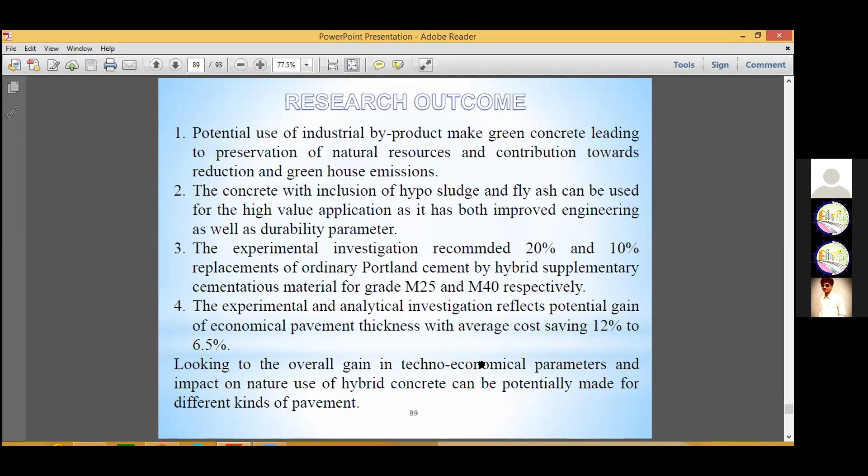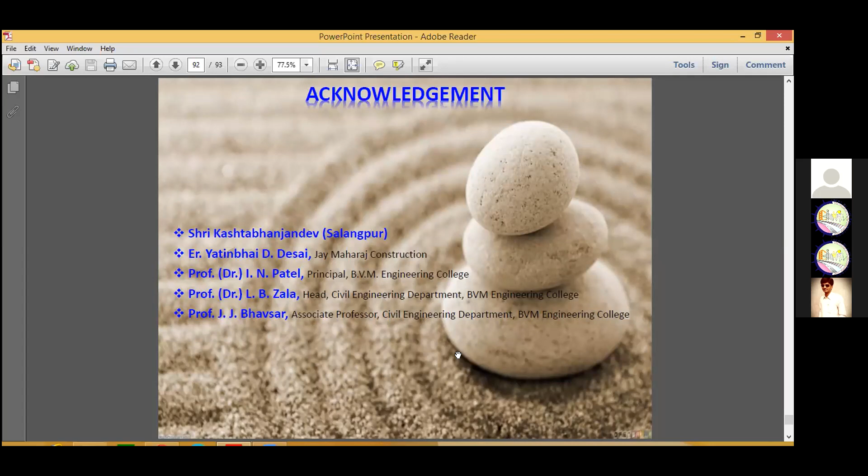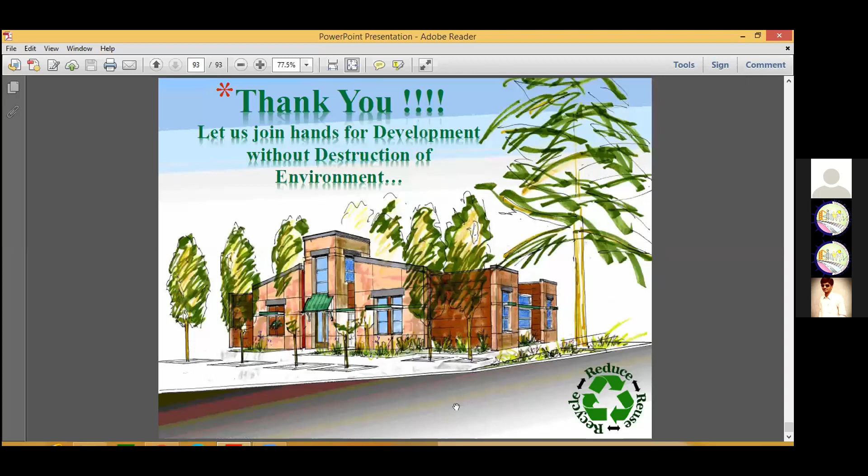And lastly, thank you. Let us join hands for development without destruction of environment. We go for recycle, reduce, reuse. Thank you all.